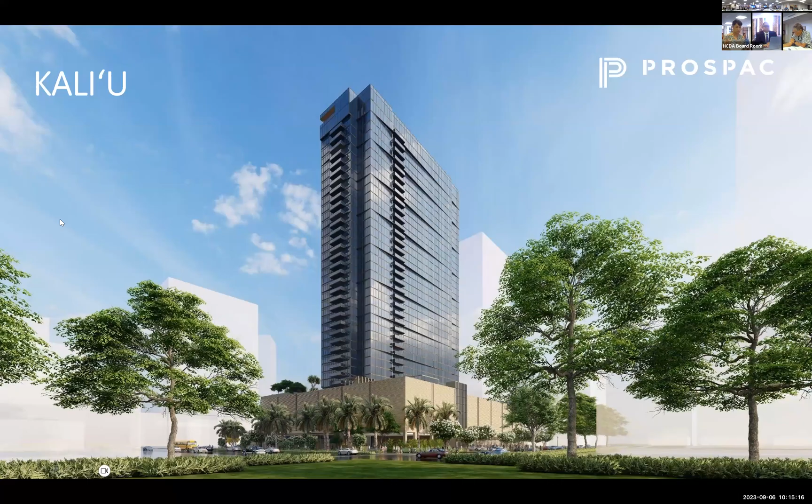Kaliu is the name of our proposed project on Block G. It is a 400-foot residential building with a 6-floor parking podium and 33 floors of residences. Our cultural expert helped us choose the name Kaliu to honor the cultural and historic significance of this region, which was once a salt basin. The name Kaliu means well-seasoned. Through our project, we envision residential, commercial, and community spaces supporting wellness for Kaka'ako.

Prospac Holdings Group and its special designated development entity, Coral Acquisition LLC, have been selected by the landowner, Kamehameha Schools, to be the development partner for Block G. Kaliu fronts Ala Moana Boulevard on the Diamond Head side of Salt Retail Complex. The project contributes to Kamehameha School's vision for a livable urban village by bringing much needed housing in close proximity of our business district, and enhancing an increasingly thriving commercial district.

Our team today will share greater details about Kaliu, but here are a few important features. Kaliu includes a mix of 1, 2, and 3-bedroom homes for sale at market rate. It complements housing on surrounding blocks of the master plan, which includes rental apartments, townhouses, and lofts. It has nearly 42,000 square feet of commercial space on the ground floor, including a space we hope to fill with a much needed grocery tenant to improve food access and options for the surrounding Kaka'ako neighborhood.

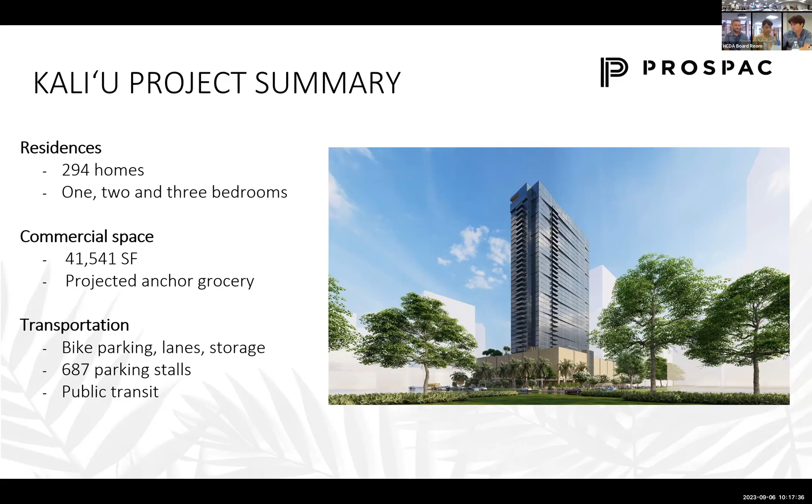In addition to shopping and restaurants, we're helping to meet the community's vision for convenient, safe, accessible transportation. Kaliu will provide bicycle parking for visitors and residents, pedestrian walkways, parking stalls, and close proximity to public transit.

Our schedule anticipates development permit approval from HCDA by the fourth quarter of this year. Upon securing approval, we would like to launch sales in the first quarter of 2024. Construction will begin in the last quarter of the same year, with target completion and occupancy in 2026.

I humbly thank you again for your time and consideration, and I would like to introduce my colleague Daniel Simonich to share with you about Kaliu's compliance, community benefits, and economic impacts.

Call your next witness. Our next witness is Daniel Simonich. Please proceed, Daniel. Please raise your right hand. Do you swear or affirm that the testimony that you'll be providing is the truth? I do. Thank you, proceed.

Good morning, Chair, board members, and HCDA staff. My name is Daniel Simonich, and I'm Director of Development at Prospac Holdings Group.

I will be giving more context of the master plan and the relationship of the project to surrounding blocks, and more details of the planning concepts and rules as they relate to the proposed development, including community benefits, public facilities, reserved housing, climate resilience, and economic impacts.

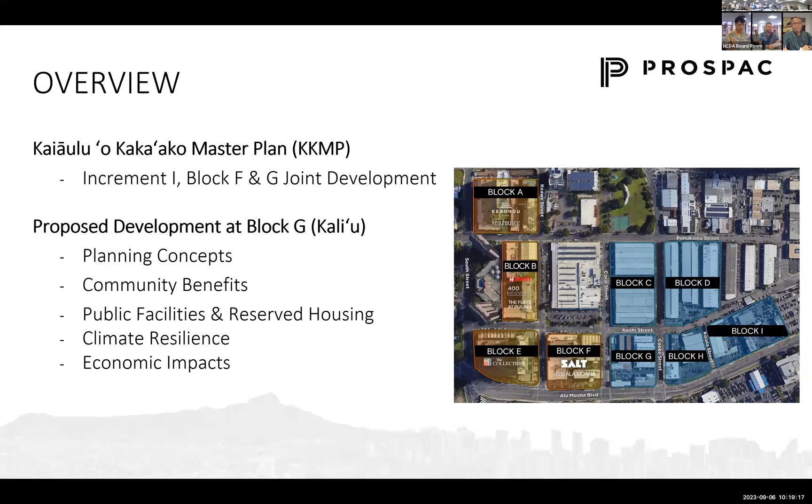The proposed project is located in the Pauahi neighborhood of Kaka'ako, which has become known as Our Kaka'ako, and has transformed what was once an underutilized light industrial neighborhood with minimal pedestrian activity into a vibrant mixed-use community where people live, work, and play.

The proposed project is part of the Kaiāulu 'o Kaka'ako Master Plan, also referred to as the KKMP, which is the product of significant stakeholder and community engagement, consultation, and public outreach. The KKMP planned for phased development with an initial first phase, or Increment 1, that included Blocks A, B, E, and F, to be implemented as a catalyst to re-energize the Mauka neighborhood.

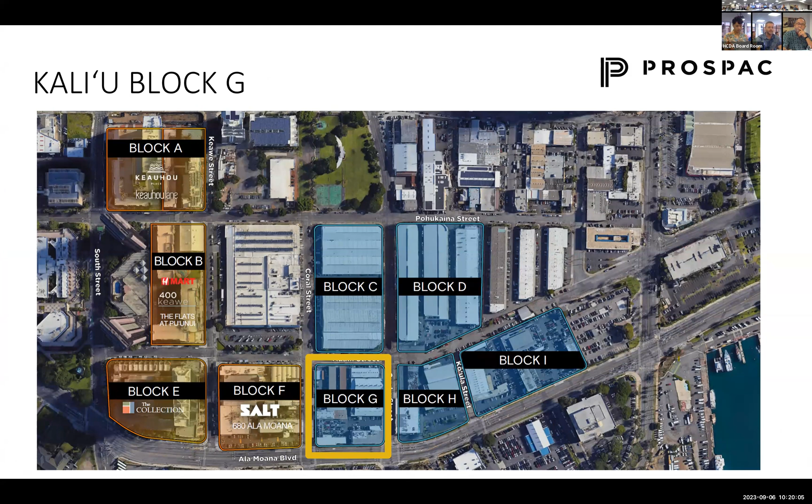The proposed Kaliu project on Block G is an important link between the first and second phases of the KKMP. It is helpful to briefly highlight how the completed first phase relates to the proposed Kaliu project on Block G as part of the second phase.

The completed developments in the first phase, Increment 1, have established key strategies and standards for the master plan, and also addressed some requirements which transfer across to the second phase with Increment 2.

The 2021 master plan amendment described the contributions of the Increment 1 developments as providing the neighborhood with over 1,300 new residential units, of which about 34% are reserved housing units, approximately 184,000 square feet of commercial space, and approximately 65,000 square feet of open space.

As a result of the completed developments and early contributions toward reserved housing and park space, there is a banked surplus of credits that can be transferred to other blocks in the second phase of the master plan.

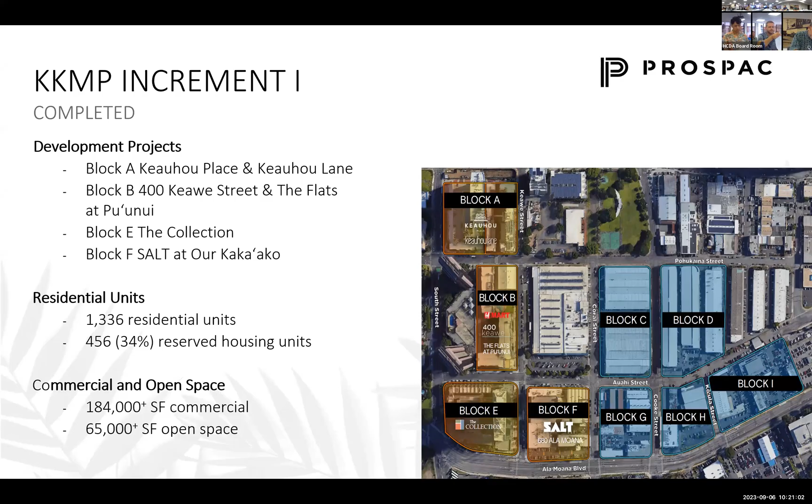Transitioning from increment 1 and increment 2 phases of the master plan, block F is located immediately adjacent to the proposed Kaliu project on block G.

Improvements to block F, SALT at our Kaka'ako, were started in 2013, early during the increment 1 first phase, with a strategy for adaptive reuse rather than redevelopment. Renovations of the existing structures considered sustainable construction methods, preservation of Kaka'ako's industrial character, and have served to become a central destination for dining, shopping, and pop-up events during development of the surrounding first phase land blocks.

The 2021 master plan amendment addresses the joint development of blocks F and G as one development block and allows for the transfer of floor area from block F to other blocks within the master plan, provided that density does not exceed the maximum permitted floor area ratio and in compliance with the 2005 Mauka Area Rules.

The 2021 master plan amendment approved joint development of blocks F and G subject to further approval by HCDA at the planned development permit stage.

The Kaliu project on block G, as a joint development with block F, proposes a combined 2.64 floor area ratio. It complies with the 2005 vested rules, which set a maximum of 3.5 floor area ratio for planned development on lots of 80,000 or more square feet.

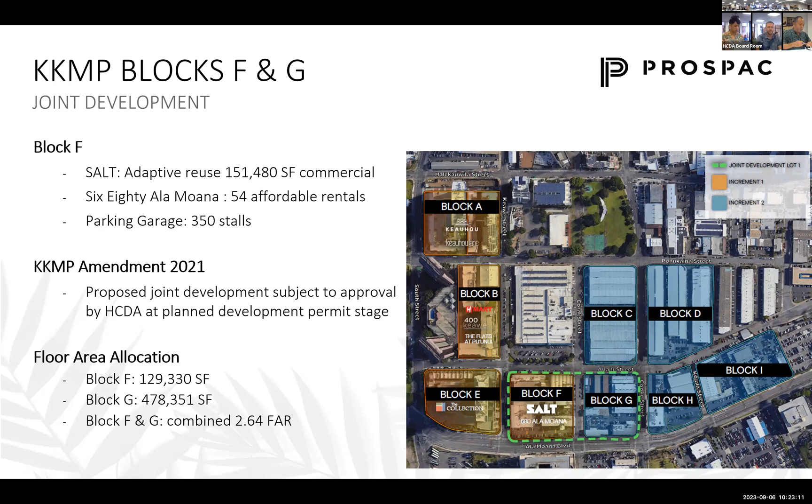The Kaliu project will contribute toward realizing many of the planning concepts and strategies proposed in the master plan, further revitalizing the area into a vibrant neighborhood with multiple elements that offer significant benefits to the Kaka'ako community, including unique retailers, restaurants, and a variety of local serving businesses and possibly grocery, connecting parkways from mauka to makai and seamlessly linking to adjacent plazas, and accessible and active pedestrian experiences with multimodal options and complete streets for everyone to easily get around and find spaces to gather together.

With a retail corridor along Auahi Street, a continuous retail frontage on the Kaliu project site extends from nearby developments completed during the first phase and planned as part of the second phase, and serves as a cohesive and attractive pedestrian experience. Storefronts are designed with sidewalk awnings, outdoor dining, seating, landscaping, bike racks, and public art.

The project is planning for a possible anchor grocery tenant, which would improve food access and options for future residents at Kaliu as well as the surrounding Kaka'ako community.

The master plan describes enhanced streetscapes along Auahi and Cooke Street to improve walkability on landscaped, tree-lined sidewalks and retail opportunities that unify the neighborhood along these major crossroads.

A park-to-park promenade at the Block G project site, intersecting the Auahi Street retail corridor, is another major component envisioned in the KKMP, which is a prominent linear park promenade along Cooke Street.

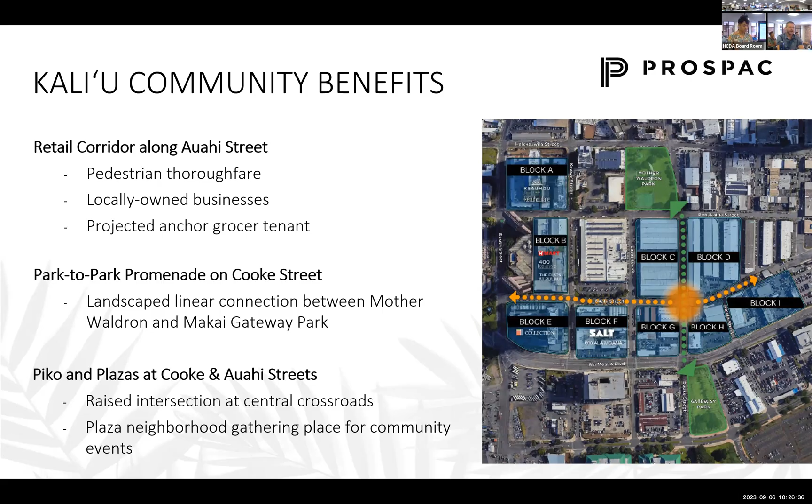The completion of the first phase of the master plan has already delivered many community benefits early and in excess of what would have been the minimum required with each incremental development. Consequently, from the master plan, there is a banked surplus of credits earned that are available for satisfying some of the public facilities and reserved housing requirements on other blocks, such as Block G.

The 2005 Mauka Area Plan and Rules envision public facility dedication requirements to contribute to necessary district-wide improvements, including pedestrian ways. The 2009 Master Plan provides that development projects implemented under the KKMP may use public facility dedication credits.

The Kaliu project has a requirement to provide 18,656 square feet of public facilities, calculated based on the proposed commercial and residential floor areas.

The project proposes to satisfy public facility dedication requirements with a combination of credits as well as the park-to-park promenade along Cooke Street, providing on-site approximately 11,813 square feet of landscape pedestrian-oriented promenade, which will be maintained and accessible to the public.

With prior projects that have been completed in the first phase, as well as park dedications, which include Pohulani Development, Makai Gateway Park, and Mother Waldron Park, the total public facility commitments to date exceed the amount required under the vested rules, which serves as a credit for future projects.

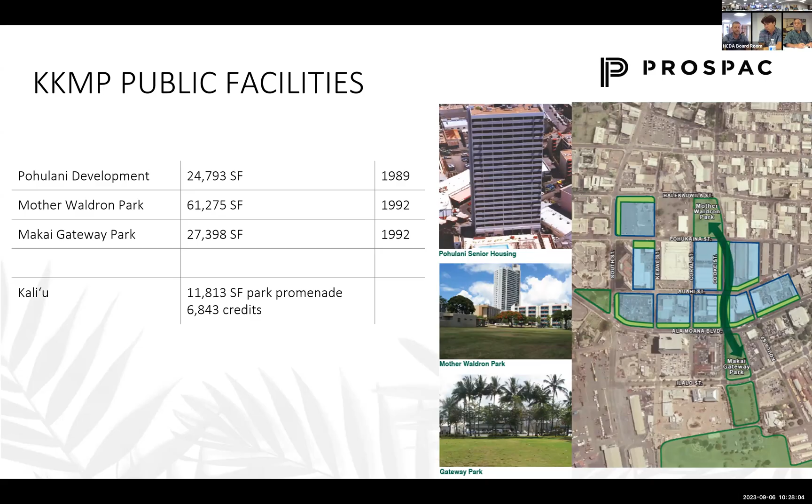Consistent with the master plan and adjusted accordingly with prior projects, after satisfying the public facility dedication requirement for Kaliu, there will remain available approximately 27,894 credits to satisfy future public facility dedication requirements for other projects in the master plan.

The 2005 Mauka Area Plan and Vested Rules envisioned reserved housing requirements to meet the needs of targeted income households. The 2009 Master Plan established a reserved housing credit process that encouraged the delivery of reserved housing in advance of construction of market housing, where if more reserved housing was constructed for any planned development than required for that project, the reserved housing credits could be used to satisfy future reserved housing requirements.

The prioritized delivery of reserved housing and the banked credits has contributed to significant affordable housing benefits in Kaka'ako to local families prior to the completion of additional market housing.

The Kaliu project proposes approximately 294 homes with a mix of 1, 2, and 3 bedroom unit types for sale at market rate. The Kaliu project, along with other development in the master plan and across Kaka'ako, provides a balanced and diverse range of new housing supply that contributes to a mixed income neighborhood.

The Kaliu project has a requirement to provide 74 reserved housing units, calculated based on the number of proposed residential units.

Consistent with the master plan and adjusted accordingly with prior projects, after satisfying the reserved housing requirement for Kaliu, there will remain available approximately 147 reserved housing unit credits to satisfy future reserved housing requirements for other projects in the master plan.

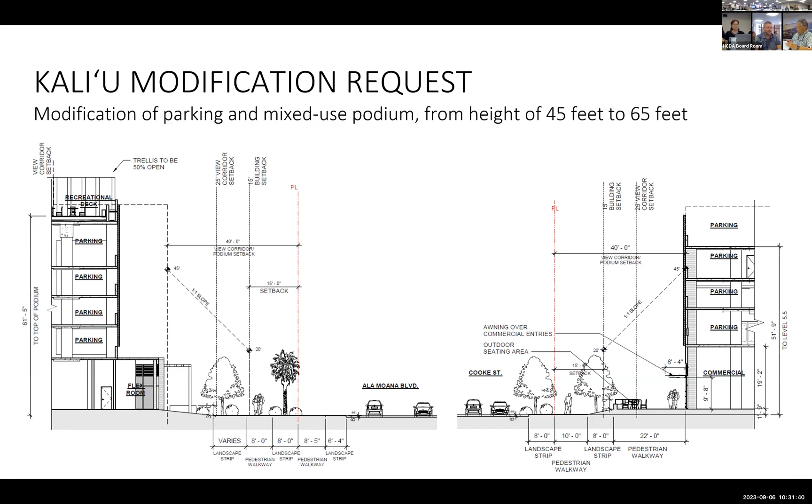To address a few points raised in the staff report and the director's presentation, we want to note that the canopy trees selected were based on the requirements of the Mauka area rules. Of course, we're open to considering other trees that provide canopy and shade.

Additionally, responding to the comment about Cooke Street landscaping, specifically at the Ala Moana Cooke Street intersection, and the suggestion for a plaza, the Ala Moana corner that's been proposed meets the requirements of the KKMP park-to-park connection.

Public corner plazas are planned for Block D and C along Cooke Street, and a corner plaza at the Ala Moana Boulevard intersection is not recommended.

That concludes my presentation, and I'm available for any questions before the next witness continues presentation of additional project information. Members or executive director, do you have any questions for this witness?

I have a question. It seems like you're going to be utilizing or considering a park promenade as part of your open space. Is there any thought of improving or revitalizing the Mother Waldron Park or the Makai Gateway as well as part of this process?

That's a great question. I think the master plan really sees these gateway parks and the promenade that connects between the two as this continuous area that can activate and create the circulation. The project proposed on site is one first part of making that connection that will continue along the adjacent site, so hopefully what's being proposed is a contribution towards further activation and use of these adjacent public parks.

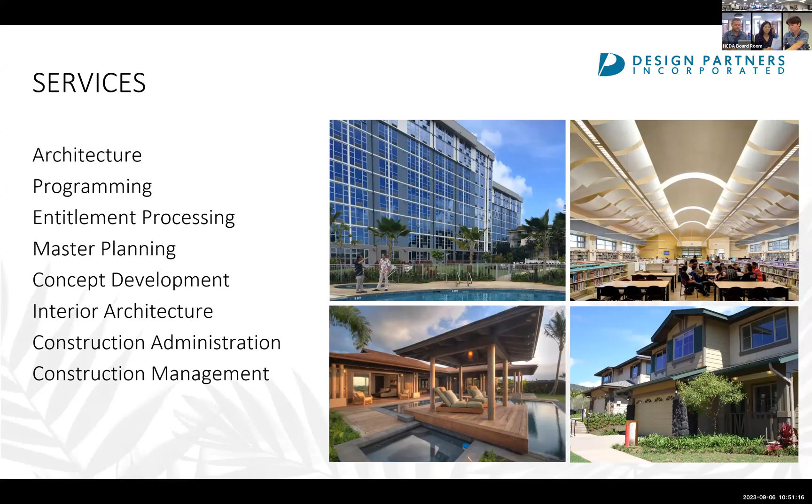We specialize in architecture, programming, entitlement processing, master planning, concept development, interior architecture, construction administration, and construction management services. We also cover a broad range of project types for both public and private sector clients, ranging from planning and design of multifamily and high-rise residential, resort residential, affordable housing, hospitality, commercial, educational, industrial, and institutional projects.

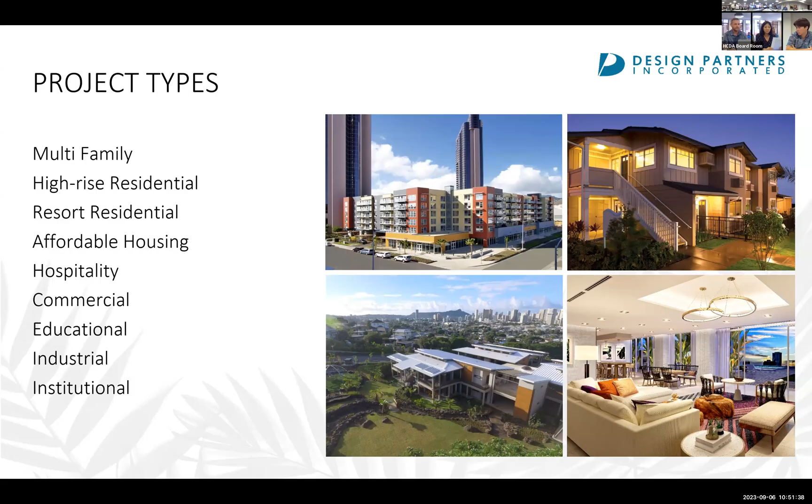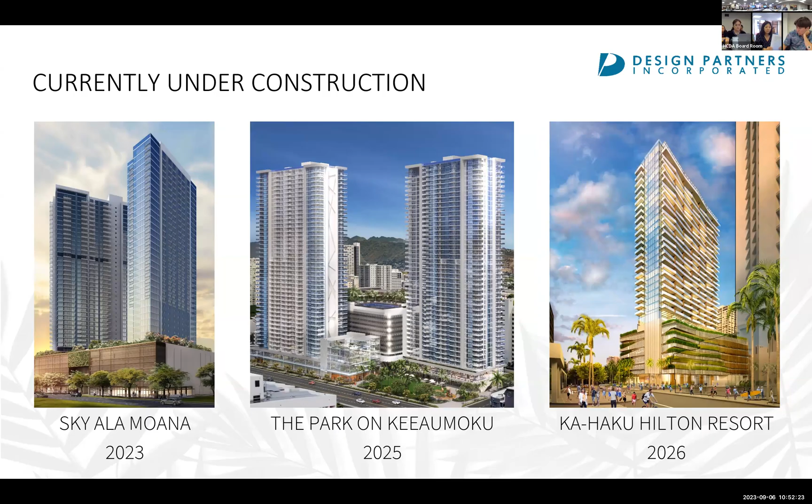Currently under construction is Sky Ala Moana, to be completed this year, the Park on Keeaumoku, to be completed in 2025, and Ka-Haku by Hilton Grand Vacations Resort, to be completed in 2026.

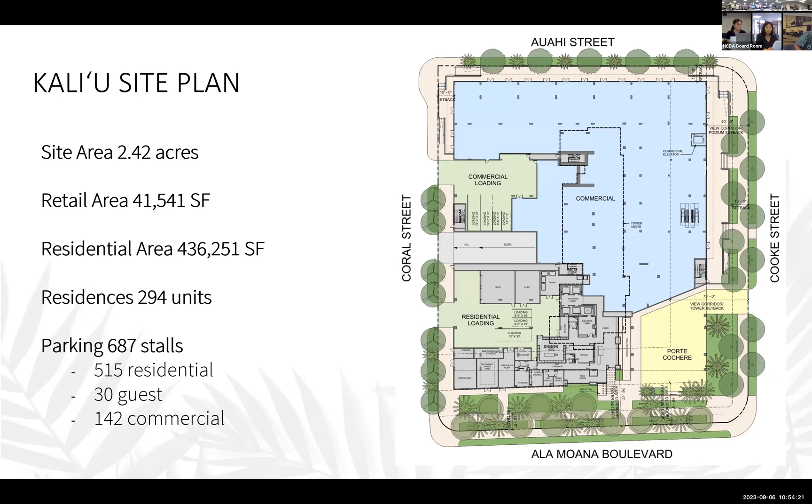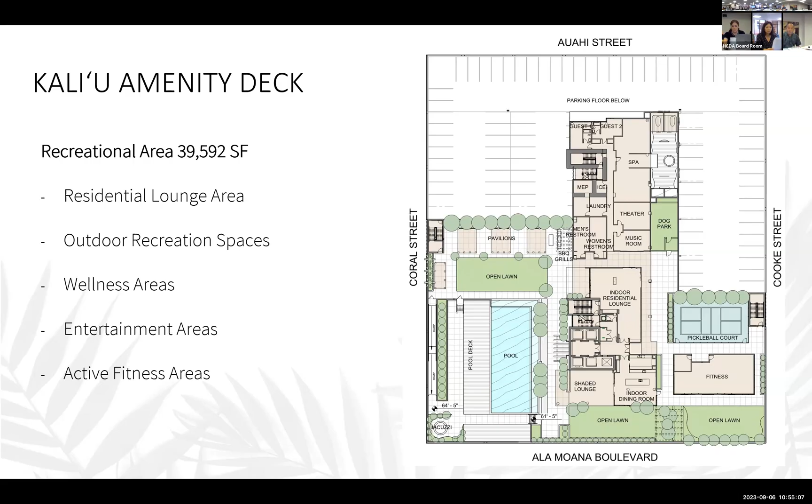The amenity deck is located on the 6th level of the podium at nearly 40,000 square feet. That includes indoor and outdoor recreation areas. It includes the following: a multi-purpose room with indoor dining and prep kitchen, indoor residential lounge, outdoor residential lounge, infinity edge swimming pool and hot tub, barbecue grills, 4 pavilions for dining, 3 large open lawn areas, spa area that includes a steam room, sauna, massage room, and hot tubs, 2 guest rooms, a theater, a music room, a fitness center, a pickleball court, and a dog park.

The following images are enlarged pedestrian zone plans that show more detail of each street frontage, followed by renderings along each street to illustrate the design intent. This is Ala Moana Boulevard frontage.

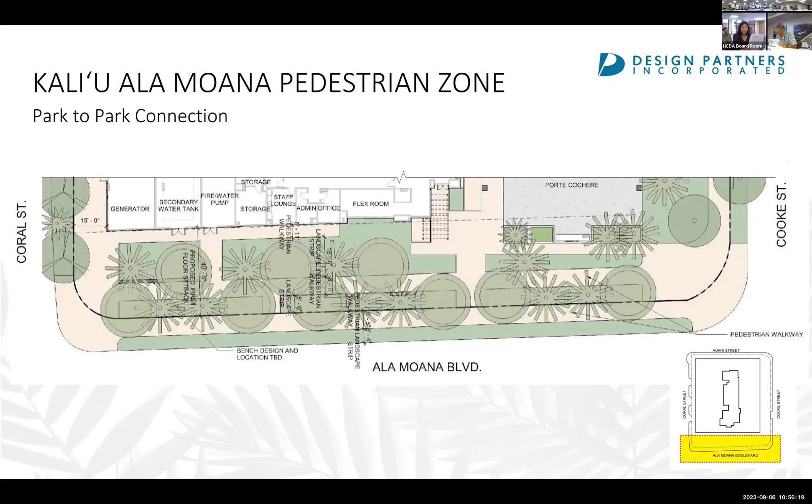This is the Ala Moana Boulevard frontage. The podium is set back 40 feet from the property line to conform with the HCDA view corridor and podium setback requirements. We include a pedestrian walkway adjacent to the landscape curbside that is more than 8 feet wide. There is also a second pedestrian walkway along this street side, bounded by sections of landscape strips on either side, enhancing the active pedestrian experience by walking between the landscape and under trees. Points of interest such as art sculptures and benches shall be incorporated to activate this side of the block.

The Cooke Street side of the project shall serve as a park-to-park connection from Mother Waldron Park to the Makai Gateway Park, including a shady pedestrian walkway under large canopy trees, creating a park-like setting. There will be a raised deck along the commercial frontage from the Mauka corner to the porte-cochere of our project site, including umbrella tables and chairs for customers and visitors to enjoy their meal or snack from the retail in the area. The porte-cochere is located at the makai corner of Cooke Street, for pickup and drop off for residents of the tower, flanked by much landscaping and the continuation of the canopy trees.